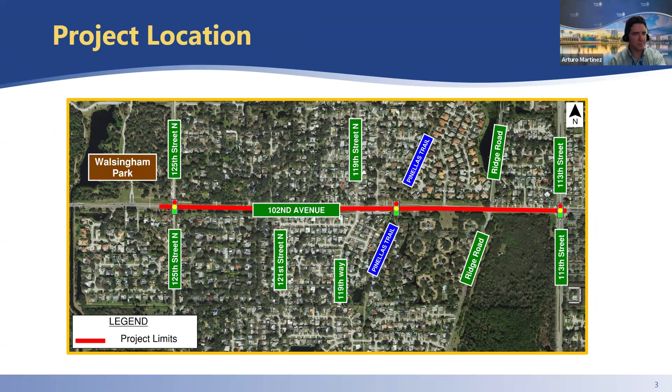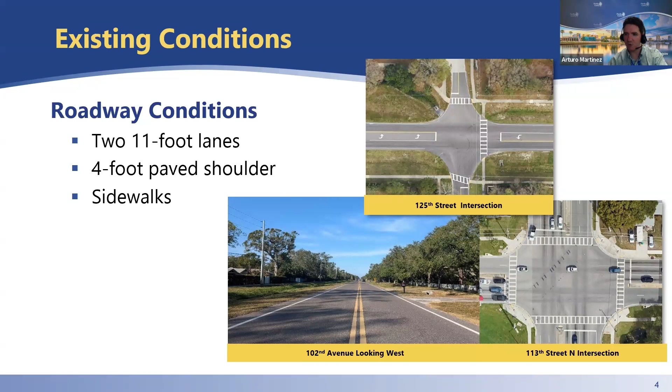This project is located on 102nd Avenue North, from west of 125th Street to 113th Street. The existing roadway consists of two 11-foot wide lanes with 4-foot paved shoulders and left turn lanes at various locations throughout the limits. There are sidewalks on both sides of the roadway with open ditches and swales present throughout the project limits. The intersection at 125th Street is unsignalized. There's currently a traffic signal at 113th Street and the Pinellas Trail intersections. The Ridge Road intersection has a bidirectional median opening.

A preliminary engineering report was completed back in 2007. The recommended alternative from that report was to widen the roadway from 2-lane to 4-lane with a raised median. Based on the feedback that we received from the public at 3 separate public information meetings held between 2007 and 2009, and the projected costs, that project was canceled. In 2021, Pinellas County prepared a project development study, again to consider various alternatives to improve 102nd Avenue North. The project development study identified various improvements that are being developed into this project to improve road safety, traffic flow, pedestrian features, and water quality within the project limits.

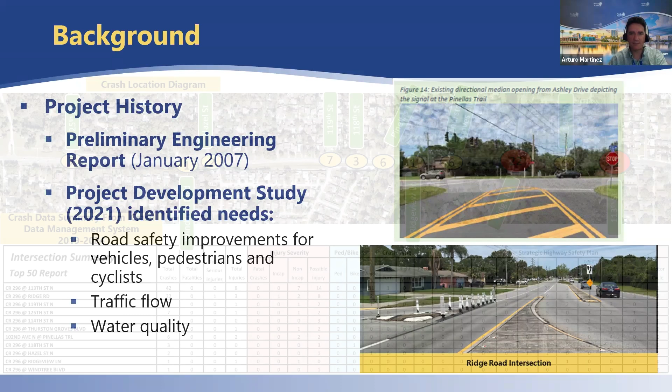Our team analyzed crash data from our crash data management system. Here we summarize that crash data from 2019 to 2024 at each intersection within the project limits. The information allowed us to design for the specific needs along the roadway and at intersections to enhance safety. The intersection at 102nd Avenue and 113th Street is a major intersection and had a crash count of 42. Another key intersection within the project limits is the intersection at 102nd Avenue and Ridge Road with 22 crashes.

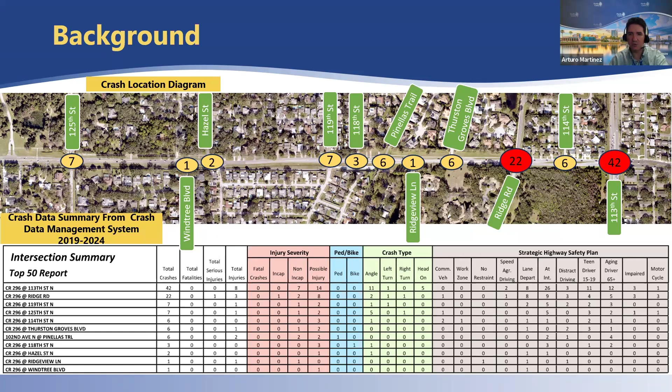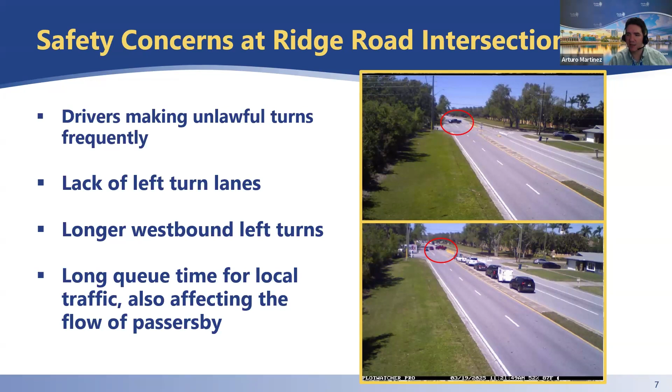There are some serious safety concerns at the Ridge Road intersection. As shown in some of these pictures captured, some drivers are making frequent dangerous turns due to the channelized median restricting north-south movement through the intersection. Also, we've noted long traffic queues trying to turn left from 102nd Avenue onto Ridge Road. This long queue is an issue for local residents, and it creates delays along 102nd for passerby traffic.

The project's primary goals are to reduce crashes and improve safety for all road users along the roadway and at intersections. This applies to local residents and to through traffic that drives 102nd on their way to and from work, but don't necessarily live in the area.

We want to improve roadway conditions by adding a center two-way turn lane to allow easy and safe access to adjacent properties, enhance pedestrian and cyclist safety by providing wider sidewalks and improved crossings at the Pinellas Trail, improve traffic efficiency by providing turn lanes and modifying intersections to reduce traffic delays, and improve water quality within the project limits.

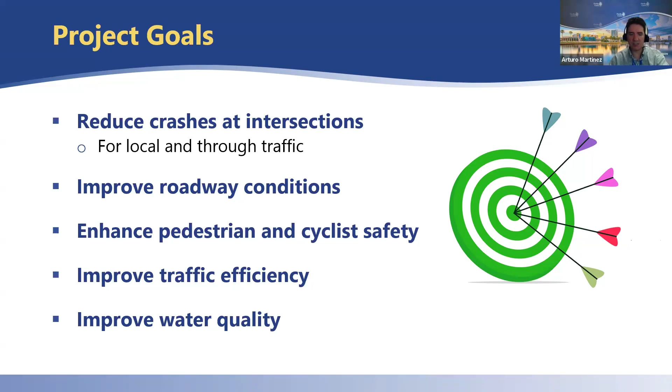This is the proposed design, including a 3-lane roadway with a center two-way left turn lane, curb and gutter, an 8-foot sidewalk on the south side, shown on the right of the figure, and a 5-foot sidewalk on the north side. This 3-lane concept was supported in 2007 by citizens concerned with a 4-lane divided option proposed in that preliminary engineering report. The center two-way left turn lane will provide safer conditions for accessing adjacent properties and avoids blocking traffic along 102nd Avenue.

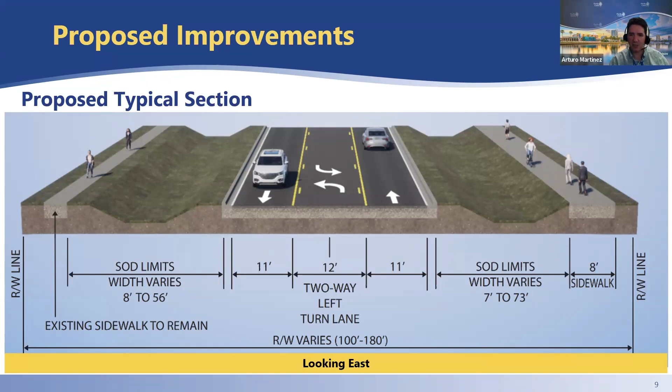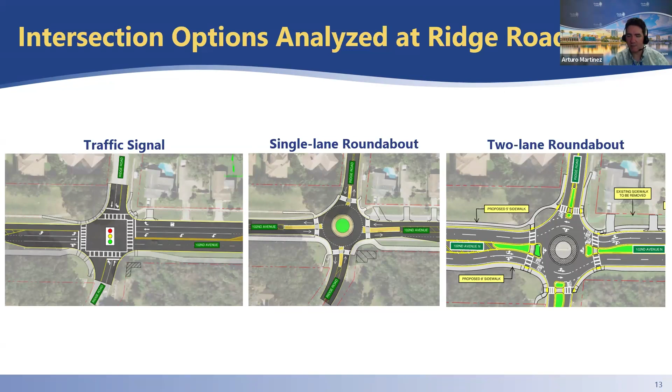So we've analyzed the Ridge Road intersection for different alternatives to enhance safety and traffic flow, with some options including a traffic signal, single-lane roundabout, and 2-lane roundabout. I'm going to discuss the pros and cons for each of these options.

The pros of the traffic signal option are that this will provide turn lanes for all directions and improve traffic and pedestrian flow to cross the intersection safely. The cons are that this will increase traffic delays at the adjacent 113th Street intersection during peak times, increase delays at Ridge Road throughout the day, create potential for increased rear-end crashes, and ultimately this option does not meet the required signal spacing due to the proximity of the signal at 113th Street.

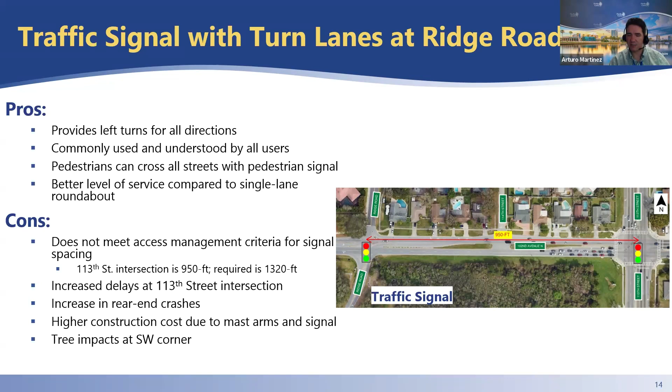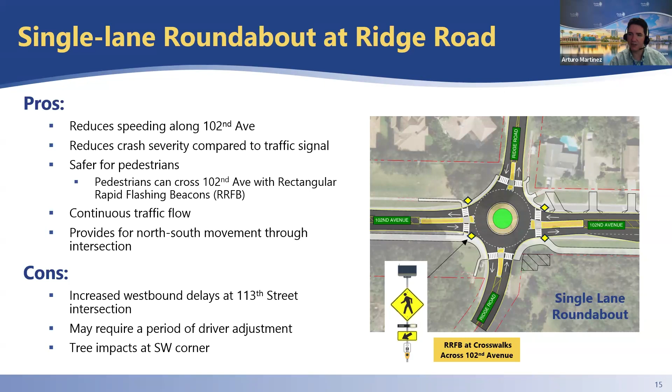The single-lane roundabout option would reduce speeds along 102nd Avenue, reduce crash severity, provide continuous traffic movements from all directions, and provide safe pedestrian movement with a pedestrian crossing and flashing beacons. However, the single-lane nature of this roundabout will significantly increase traffic delays at the adjacent 113th Street intersection, as it does not provide the necessary roadway capacity.

The benefits of the proposed two-lane roundabout are similar to the single-lane roundabout, but this option provides the needed capacity to move traffic through and around the intersection, which will reduce delays at the 113th Street intersection. While this option will require a period of driver adjustment, it will improve the safety of the intersection, eliminating unsafe movements of north and southbound traffic that we discussed earlier. This roundabout will allow for the proper movement of vehicles in all directions of travel for local residents and drivers that use 102nd as part of their daily commute.

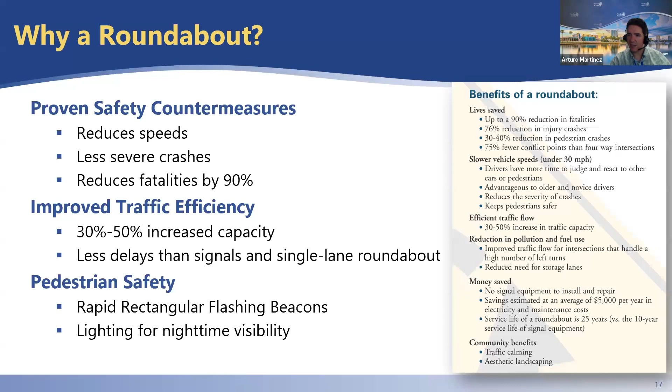Roundabouts are a proven way to enhance safety by reducing vehicle speeds, reducing the number and severity of crashes, improving traffic efficiency, and providing improved pedestrian safety through shorter crossing distances and nighttime visibility.

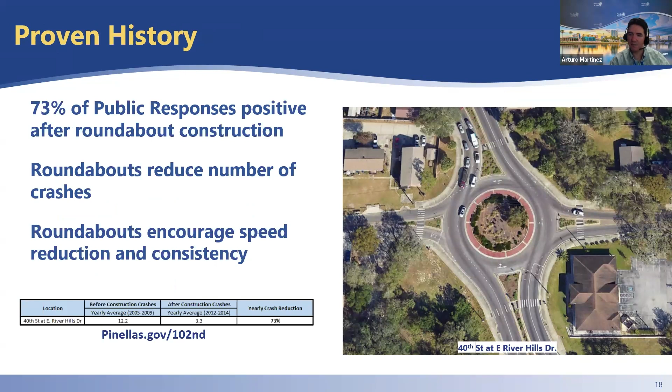This proposed roundabout is not like the Clearwater roundabout, so we wanted to show a similar example based on traffic flow and patterns. This is an aerial view of a two-lane roundabout at 40th Street and East River Hills Drive, constructed 12 years ago in Hillsborough County.

Since that time, FDOT has collected data showing a 73% decrease in crashes at this intersection, and public engagement shows 73% of responses are positive about the roundabout after construction. For more information, we have a relevant case scenario with video of traffic going through this intersection on our project webpage.

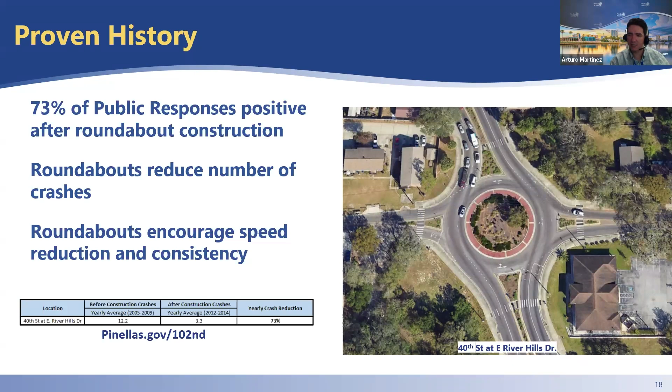This is a graphic showing the aerial view of the proposed two-lane roundabout at 102nd Avenue with the pedestrian crossings, flashing beacons, and pavement markings.

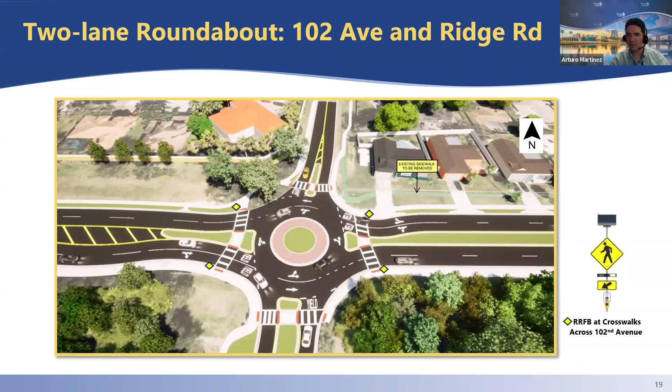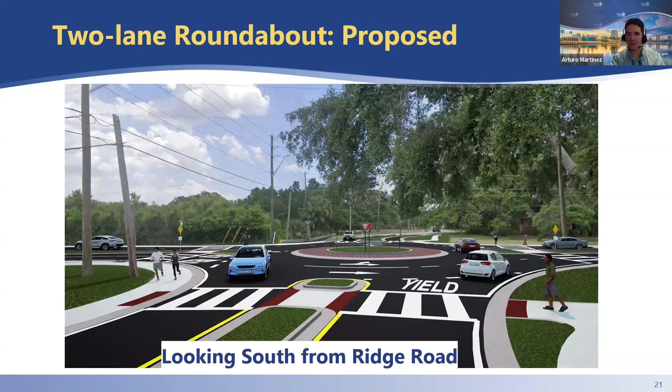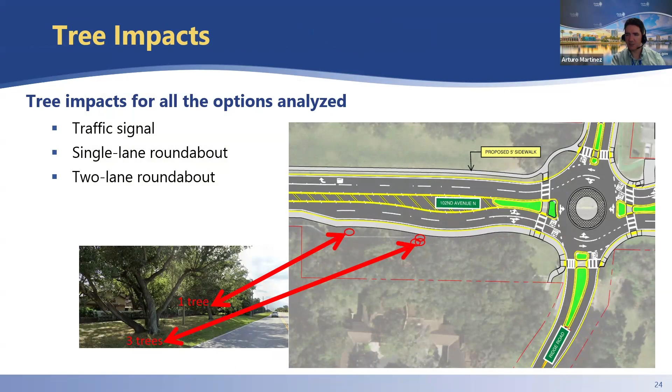There are approximately 4 trees anticipated to be impacted with the options mentioned at the Ridge Road intersection. No other trees are expected to be impacted along 102nd Avenue as part of this project.

Based on the intersection options analyzed, crash history, and safety concerns, we are recommending the two-lane roundabout to enhance safety and traffic efficiency at the Ridge Road intersection.

Again, we only anticipate having to remove 4 trees at the Ridge Road intersection, and an easement is needed from St. Petersburg College to address necessary drainage adjustments at Ridge Road.

During construction of the project, access to homes will be maintained. It's anticipated that 1 lane of traffic will remain open in each direction, with temporary lane closures for some operations.

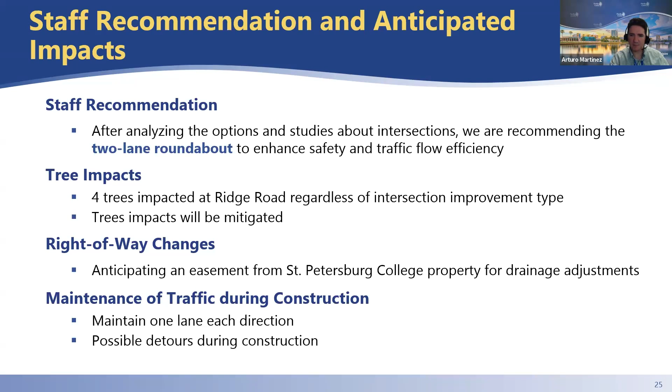As we move forward with the project, we will post this presentation on the project website, and your feedback will be reviewed and addressed as the design progresses. We look forward to continuing to receive your feedback and responding to your comments through communication with our project manager, publishing information on the webpage, or if necessary, future public information meetings.

Final project design is anticipated in the spring of 2026, advertisement for construction in the summer of 2026. Then construction is anticipated to begin in early 2027 and be completed in early 2028.

Thank you for reviewing this presentation. For additional information, feel free to reach out to the county's project manager, Kathy Fernandez, at the email and phone number provided. This project is funded by Penny for Pinellas, and we thank you for your support in helping improve our community.

Next question: it looks like the ditches will remain on the north side of 102nd between 125th and Hazel. Scott, could you confirm if the ditches are remaining? It says north side between 125th and Hazel. Can you go to that on the graphics? Yep, they are remaining, Scott. They're pretty much remaining through most of the project limits.

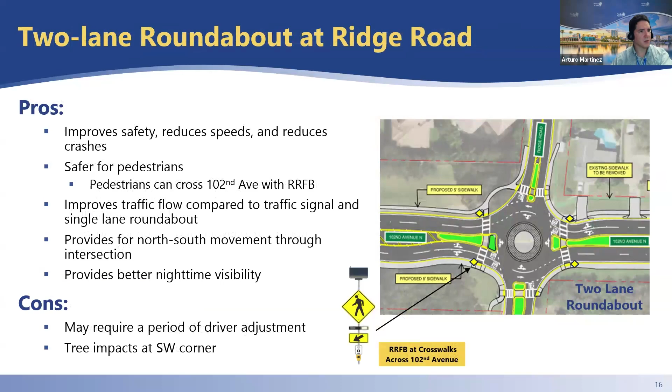We're looking, based on where we go from here, to complete the design in spring of 2026. Once we start construction, looking at early 2027, we'll be about a year in construction. Once we get into that, we'll have a much better idea, and we'll communicate directly with whoever's on 102nd that's going to be directly impacted, so you know what's coming, and the contractor will work with you.

Right now, we're anticipating that one lane will stay open. So one lane, whether that's eastbound or westbound on 102nd, will be open at a time, while the other lane is being constructed.

Let me expand on that. The plans we're developing will have what we call a maintenance of traffic plan set, which will address how traffic actually flows across the corridor and accesses side streets. Because we're adding a center turn lane, the design will maintain traffic in both directions in their individual lanes as we widen one side or the other as necessary. That's one thing Pavan's group is looking at in the design, to make sure traffic flows in both directions at all times.

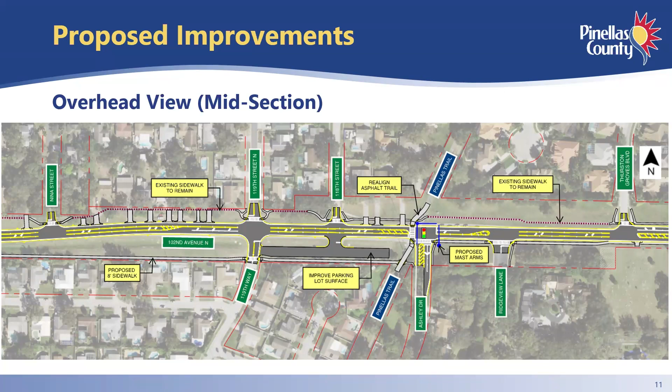Okay, thank you very much. I believe a postcard did go out to everybody so they could participate in today's meeting. We have a capacity of 1,000 people for this meeting, so they could have come. If they couldn't come because they were possibly working at this time or going to church tonight, they can still have their voice heard by writing in or talking to the project manager. There's also a comment card you can fill out on the website. So thank you for your concern for your neighbors, making sure their voices are heard as well.

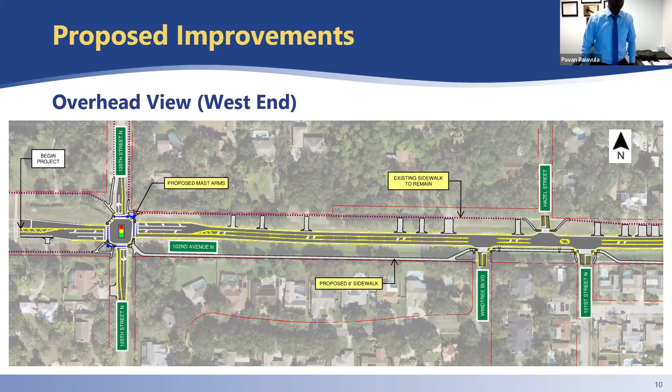Yeah, I think Arturo's response may have been misunderstood. What he was trying to explain is that with that two-way center turn lane, when the mail is being delivered, we see this even on two-lane roadways with curb and gutter. If you're traveling down any roadway and the mailman stops to put mail in the box, what do cars typically do? If there's oncoming traffic, the cars will stop behind the postal carrier. If there's no vehicles coming and there's room to pass, then they'll pass around. That's what he was referring to with having that two-way center turn lane, there would be the capability for vehicles to go around that stopped mail truck to continue moving. The mail carrier, you're right, is not going to get into the center turn lane to deliver mail, it's the opposite. Okay, thank you.

Next one is, please more fully explain why you believe our properties won't be at risk for increased storm flooding after you add more concrete roadways and remove the current soil and grassy areas that currently aid drainage. And Rob, maybe you can expand on that.

Okay, yeah, and that's an obvious concern, and that is what we plan for. Whenever we add impervious surface, which is the roadway, the sidewalk, concrete, things of that nature, we have to account for that. We have to take that amount of water falling during the storm, and there's calculations and models for that our engineers use. They have to calculate the amount of water falling on that impervious surface, take into account where that sidewalk or roadway slopes to, where that water is going to go, and then how it's going to get collected. So anytime we add impervious surface, we have to account for that.

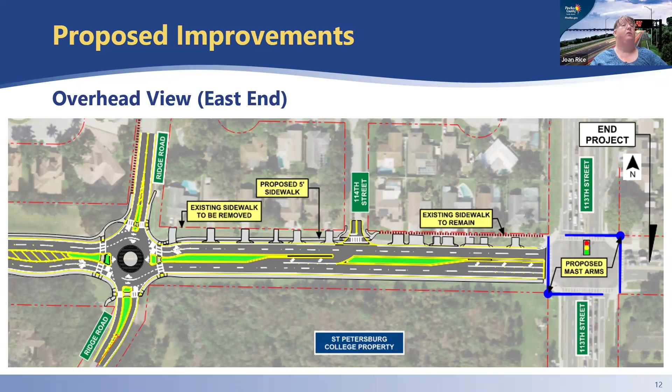Currently, the south side sidewalk between 121st Street and Windtree is along the fence line, far away from busy 102nd. Why is that section being moved next to 102nd? It'll be less safe to walk pets so close to the road. Maybe you can tell us what is the distance between the curb and the sidewalk?

Pavan, do you have some of that information with you? Can you repeat that again between Windtree and the 121st? Between 121st and Windtree, right now the sidewalk is along the fence line, so it's far away from the busy road. Why is that section being moved out next to 102nd? It'll be less safe to walk pets so close to the road.

The reason behind it is there are two intersections close by, Windtree Boulevard and 121st Street North. We want to make sure pedestrians are crossing near the intersection for safety in front of the stop bar, rather than a mid-block crossing within the side street, which is unsafe. We're trying to improve that condition and move it closer to the roadway so they can cross safely at the intersection. Okay, but is the sidewalk right next to the curb?

Is there going to be a green space between the road and the sidewalk? How far away will it be? Will you feel like you're walking next to the road, or will it be a safe distance away? There will be a grass strip between the curb and the sidewalk.

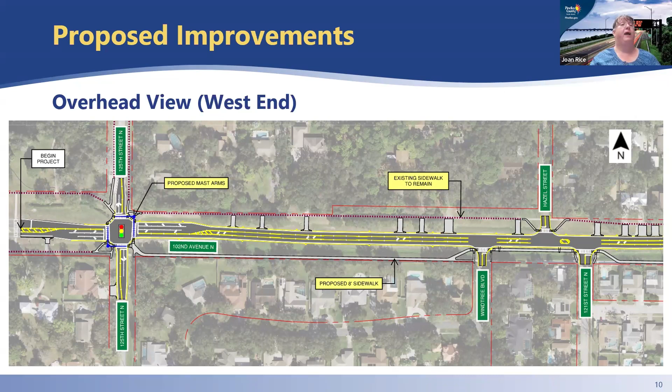So we answered that one, and I answered that one. The reason the traffic volume decreased is because Ulmerton was undergoing major construction in 2007, so more traffic was using 102nd at the time. That's an observation. At this point, we have read all of the comments.